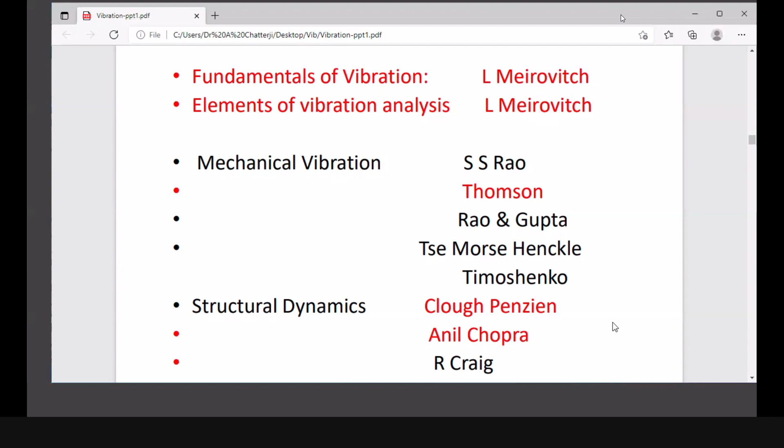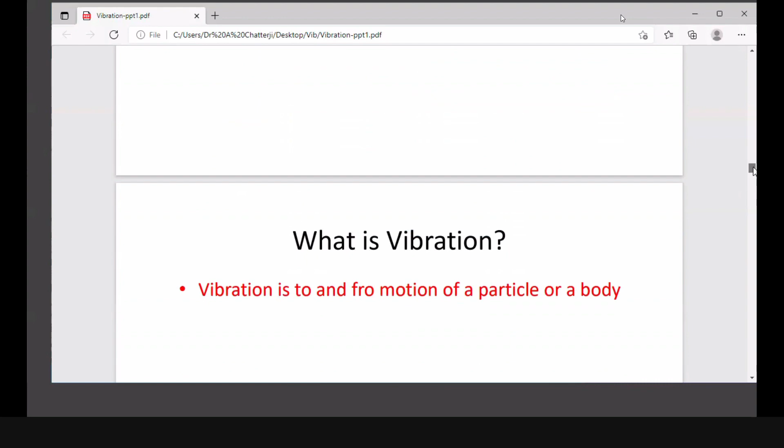All correct, correct, correct. So you need not write down anything, just read the writings, and we can have a discussion on it. Understand? But yes, our subject starts from here.

The definition of vibration - but I will never ask this in exam. What exactly is vibration? Vibration is basically, simply saying, to and fro motion of a particle or a body about an equilibrium position. This to and fro motion may be a linear motion or it may be an angular motion. When it is a linear motion like a spring mass, we call it vibration. But when it is an angular motion, we generally don't use the term vibration, we call it oscillation.

So oscillation refers to and fro motion of angular position, whereas vibration refers to and fro motion along a linear direction. But ultimately the physics is the same. Whatever mathematics is applicable for oscillation, the same mathematics is applicable for vibration. I may use the terms combinedly, but basically they are the same - vibration, oscillation, basically they are same.

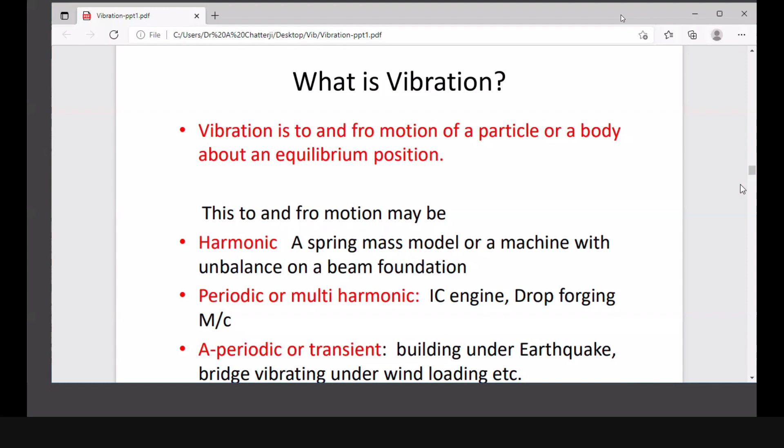These to and fro motions may be harmonic, may be periodic, and may be aperiodic. Harmonic means this to and fro motion follows a sine function, a single sine function. It happens for a spring mass model, or it happens if a machine with an unbalance is placed on a beam. So these are examples where vibration occurs along a harmonic function, single frequency.

Periodic is where a vibration is not a sine function, but it is periodic. By Fourier series theory, we know any periodic function can be written in a series form having sine and cosine terms. So a periodic function is nothing but a combination of multiple harmonics. Harmonic means single harmonic, periodic means many harmonics. IC engine, drop forging machine, these are examples.

However, in our subject, our main focus will be harmonic, and then our focus will be aperiodic. We will discuss very little on this, but we will discuss it.

Aperiodic and transient - what is the difference between harmonic, aperiodic, and transient? Harmonic vibration remains for a long time, maybe minutes or even hours. Aperiodic or transient vibration remains for a very short time, a few seconds, like a vehicle falling into a bump or a road pothole. You feel a vibration, but that lasts for a few seconds - that is aperiodic. Earthquake comes and the building shakes, or wind, cyclone comes, building shakes. Again this is transient because this lasts for a few minutes. This short duration vibration does not follow a sine curve, but remains for very short duration. That is called aperiodic or transient vibration.

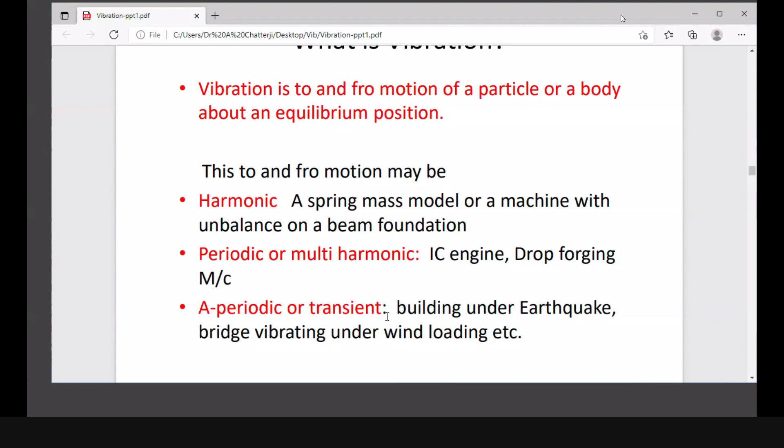And if it is a periodic function, we can break it into individual harmonics. The fundamental harmonic will be 2 pi by time period T. Agree? When we break a periodic function into multiple harmonics, the fundamental harmonic is always 2 pi by time period T. So the second harmonic will be 2 into omega, the third harmonic will be 3 into omega. So we get all the harmonics. So this is a periodic signal - how it will look like.

I don't want to ask this question now, but you can take it as a home assignment - this is a slightly advanced level problem, so I shouldn't give you this today. But for those interested in writing programs, I give you the values of this function for one time period, say 100 values within the one time period, so you can draw the graph. Once I give you the 100 values, can you carry out some mathematics and tell me this is the fundamental harmonic, this is the second harmonic, this is the third harmonic? You have to go for Fourier series extraction and write a program. The mathematics is not difficult, but you have to write a program. You just see if you are interested, but I cannot call it homework right now - this is slightly advanced level homework, fine.

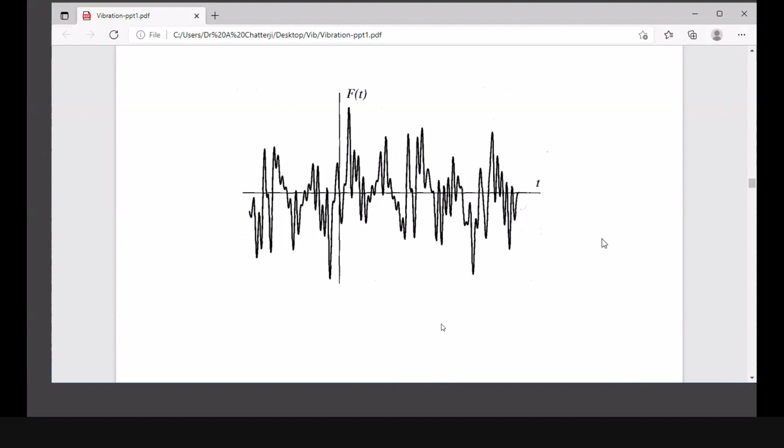Let me come to the simplest example of vibration, spring mass, and this is the equation of motion. This is for translation vibration and this is for angular oscillation. But their equations are similar. Second derivative, here also second derivative. So if I can solve this equation, I can solve this equation also. I will not take up the pendulum equation.

I will take up the spring mass equation. Remember, yesterday I mentioned this is the linearized equation because fundamentally it is sine theta. For small theta, we assume sine theta can be replaced by theta. So this is the linearized equation, and after that I can say this equation is similar to this. So a simple spring mass system, the mathematical equation will look like m x double dot plus k x is equal to

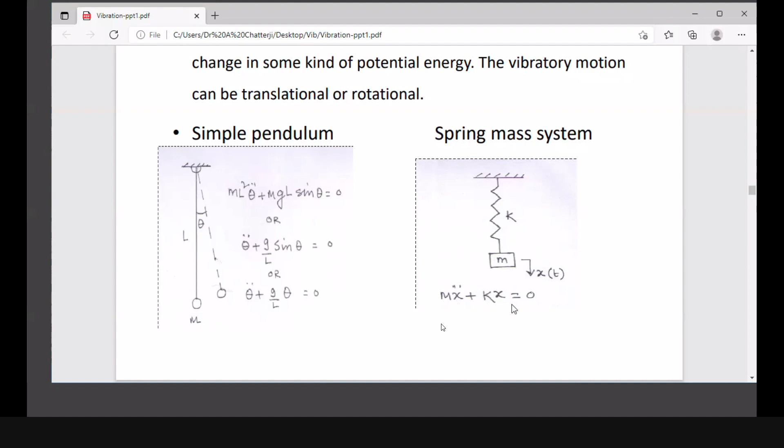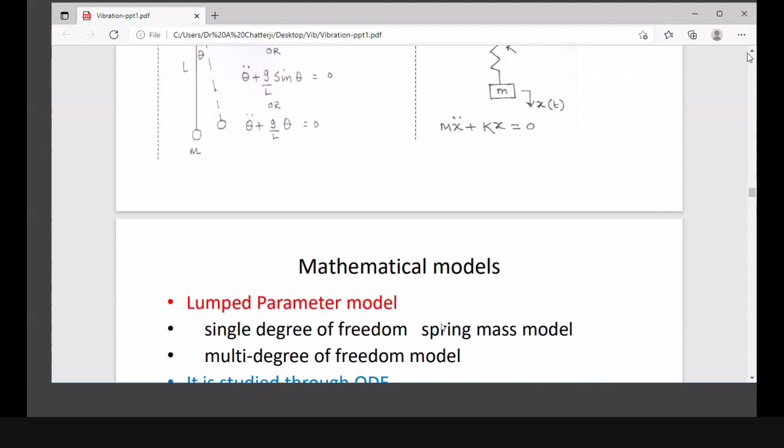0. Question is how the solution will look like. That we'll discuss. But this is called the mathematical model. So mathematical model for a simple pendulum is very easy. But mathematical model for other physical examples may not be easy.

So mathematical models are of two types, lumped parameter model and distributed parameter model. First two months, we will be in lumped parameter model, and from March onward, we will go into distributed parameter model.

It is studied through ordinary differential equations, whereas the continuous system model, where we consider the system as a continuous medium, like a cantilever beam or a simply supported beam, is studied through partial differential equations. Okay, but this I will not focus on now.

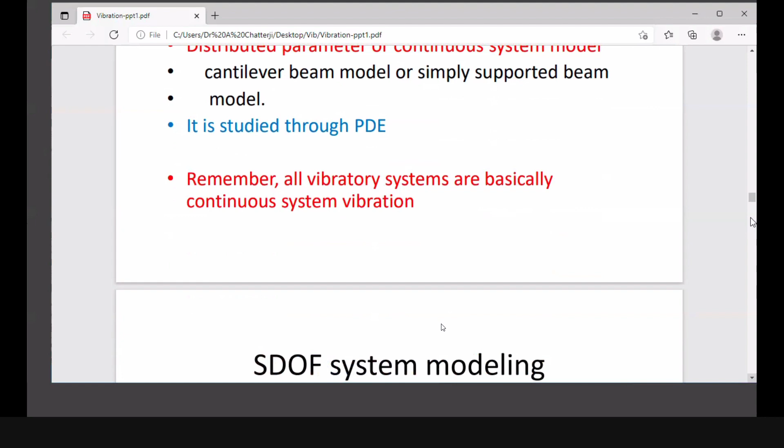In the months of January, February, and March, we will spend time on lumped parameter model. So lumped parameter model also we will start with single degree of freedom.

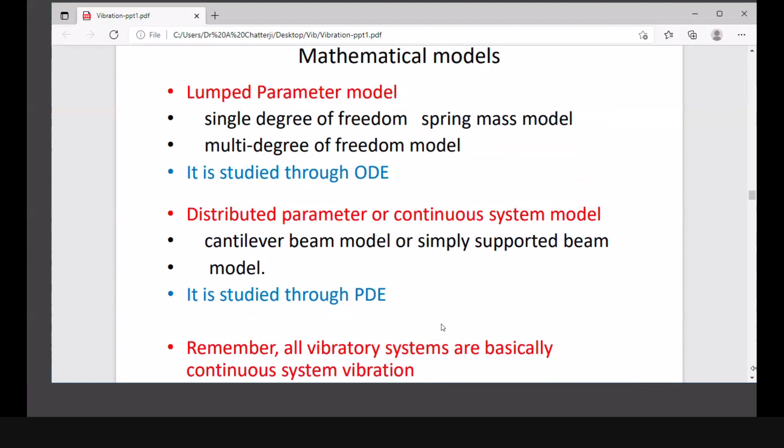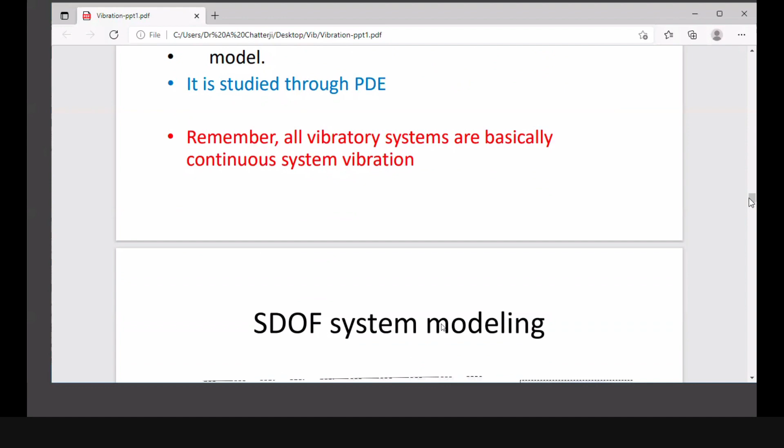Now please remember that all vibratory systems are basically continuous systems. They are not lumped parameter. But we always start with lumped parameter model because the mathematics is easy to handle. But whatever answer we get from lumped parameter model, it's not exact, not very, very accurate. But at least we get some idea of the answer. And that is why we always begin with a lumped parameter model.

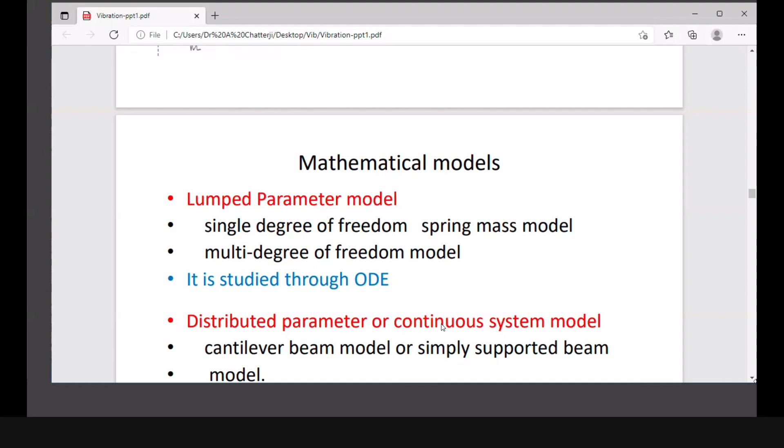But if we are expert in mathematics, we will go for continuous system model. So this is called the simplest single degree of freedom lumped parameter model.

So in lumped parameter model, let me begin with the simplest example, single degree of freedom model. This is a real life problem and this is a symbolic problem, or this is a laboratory model problem. In real life, we never find a mass hanging from a spring. In real life, what we see is different, but it is equivalent to this laboratory model.

So in real life, I have a concrete beam in a factory, and on top of the concrete beam, I have a machine placed. Unfortunately, some unbalance is present. Because of the unbalance, there will be a centrifugal force m e omega square. The vertical component of the centrifugal force will be m e omega square sine omega t. This is a harmonic function. Because of this force, this beam will vibrate up and down.

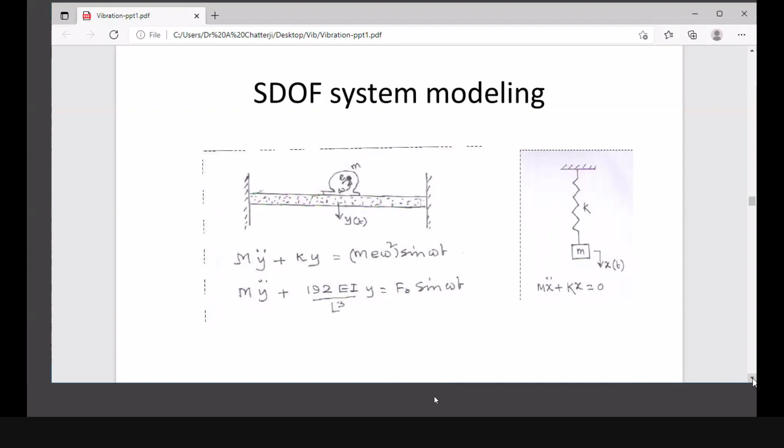By mathematical model, I mean we first write the problem as a differential equation and then we solve the differential equation. So in this case the mathematical model was simple because I modeled it through only one spring, one mass.

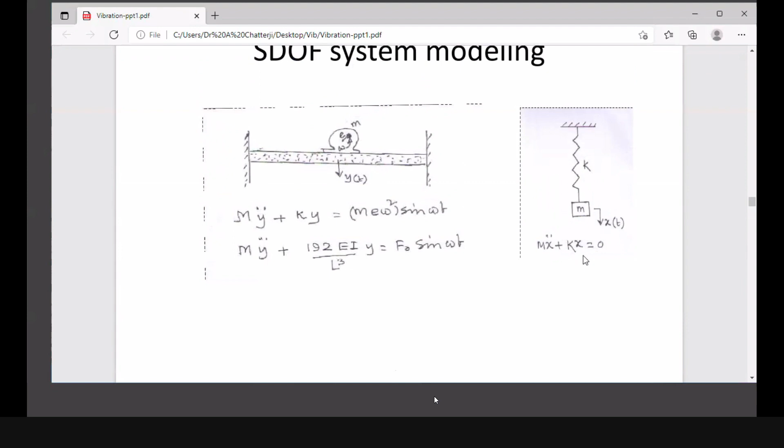So this was only a single second order differential equation. But look at the model of a car. I was talking about the model of a vehicle, a four-wheeler. So many springs are there. Its mathematical model is really going to be complicated, but we will discuss that and you can do that.

But this mathematical model will not be a single differential equation. There will be many, many differential equations. And the problems are of two types.

How do I write down those differential equations? Meaning how do I get those differential equations? That itself is a difficult question. And second is, once I get all the differential equations, how do I solve them?

Because I have more than one differential equation and they are coupled differential equations. How do I solve them? So the challenge increases when my model becomes multi-degree of freedom.

In the previous case, it was single degree of freedom. But now my model is multi-degree of freedom. So the challenge increases. And this challenge increases in two areas.

First, how to write down the equations. We'll discuss that. And second, how to solve them. We'll discuss that. But this is definitely a challenging job.

But once you can write down the equations and once you can solve the equations, now you are a master. Any automobile company will pick you up because you can tell them how the automobile vibrates when it is moving

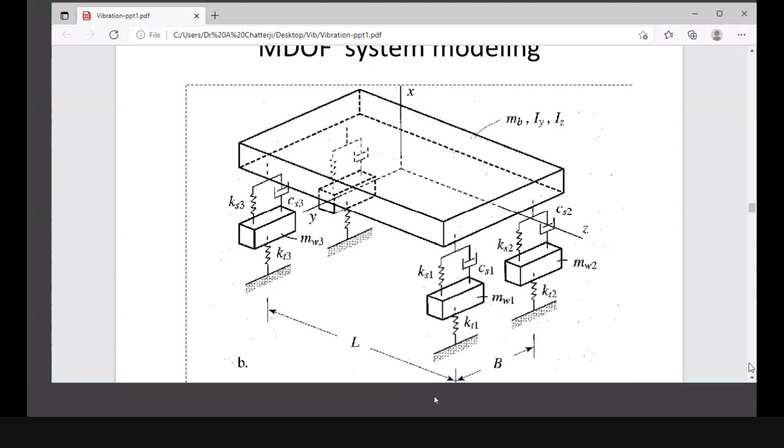We'll discuss later how a motorcycle is modeled and analyzed. So basically, modeling can be of 3 types: lump parameter single degree of freedom, lump parameter multi-degree of freedom, and a more exact model, the continuous system model. We will discuss all 3.

Coming to force, the simplest is harmonic, then periodic, then aperiodic. So this is our syllabus. We'll discuss single degree of freedom lump parameter model, multi-degree of freedom lump parameter model, continuous system model, and fourth, harmonic, periodic, and aperiodic forces.

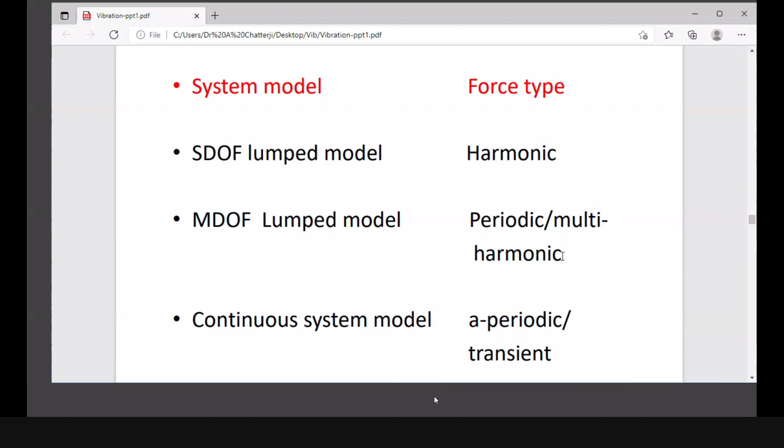This is the total syllabus, but it's very difficult to complete it in 3-4 months. Let me see how I can manage it.

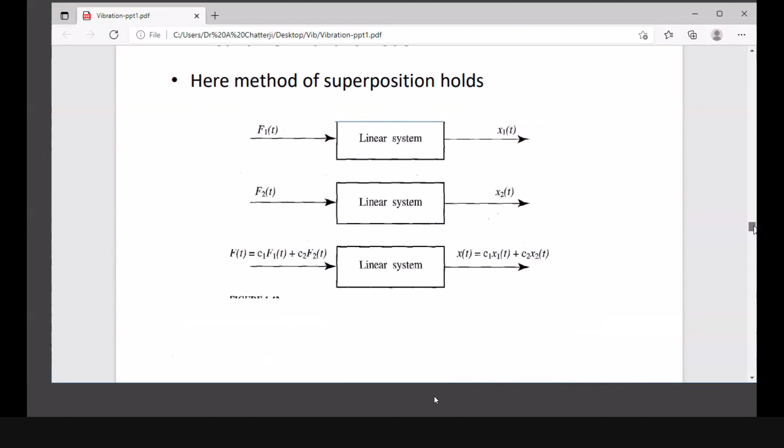Okay, any questions so far? Whatever I have discussed till now, does any question come to your mind?

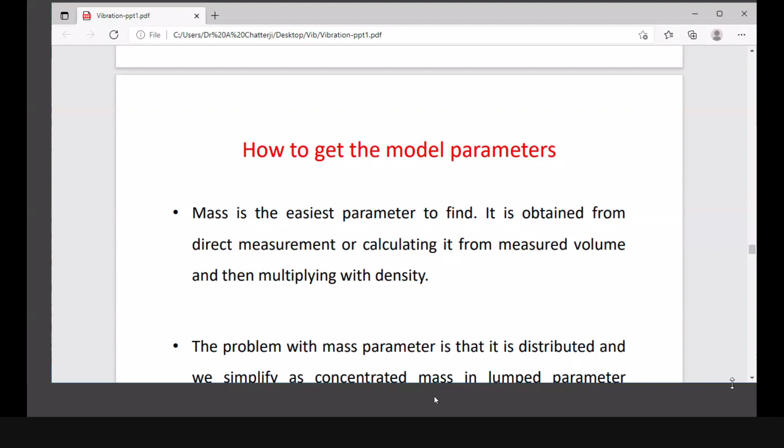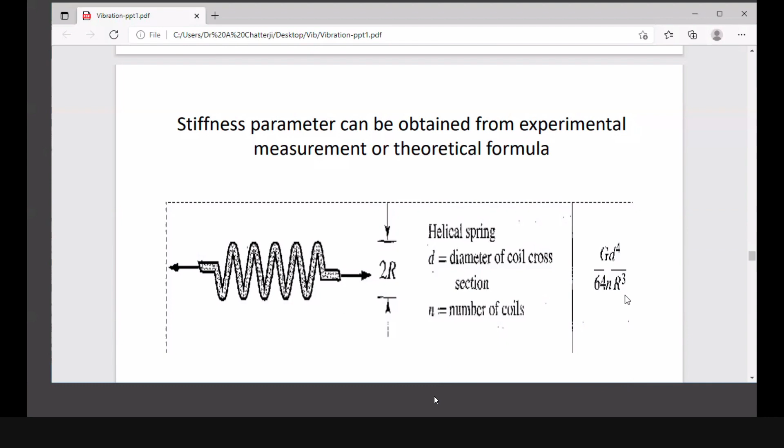Stiffness is also not that difficult. What we do is use solid mechanics formulas. So if I'm given a helical spring, I know how to calculate its stiffness—this is the formula you used in your second year practical, if you remember. Then there are various other formulas.

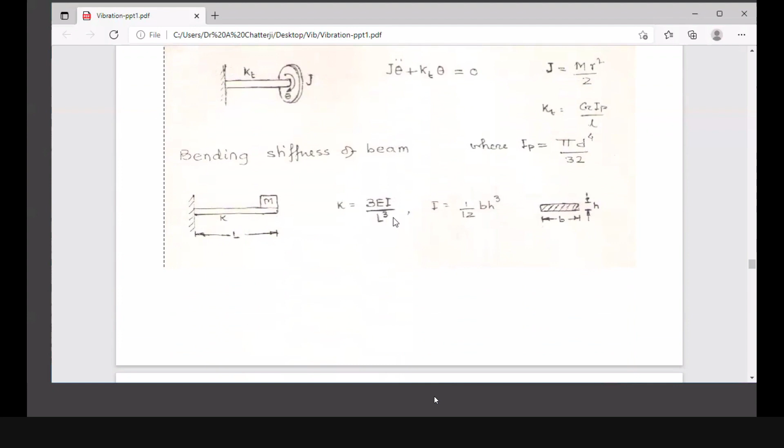If I have a cantilever beam, stiffness is 3EI by L cubed. And I told you that for a simply supported beam, stiffness is 48EI by L cubed, and for a fixed beam it's 192EI by L cubed when the vibration is at the midpoint. But if the vibration is not at the midpoint, at some distance A and distance B instead, the stiffness formula is different.

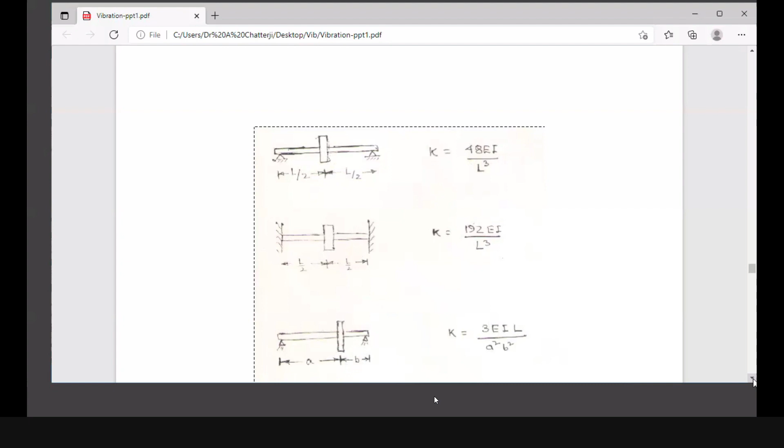It's not just one formula—for simply supported beams, 48EI by L cubed applies when vibration is measured at the center. If vibration is measured somewhere else, we have a different formula. All these formulas come from solid mechanics, so it's not difficult to get the stiffness.

However, the most problematic parameter, gentlemen, is damping. Why have we been silent about damping so far? Because although damping is present in vibration, we generally avoid dealing with it since it's a very difficult parameter to understand and quantify—it is invisible.

And because we can't understand it properly, we often assume it to be viscous damping, since the mathematics becomes simple. But actually, the damping may not be viscous.

Even if damping is not viscous, we assume it is viscous because the mathematics is easy. Is that correct? We'll discuss that - partly it is correct, and partly, 100%, it is not correct.

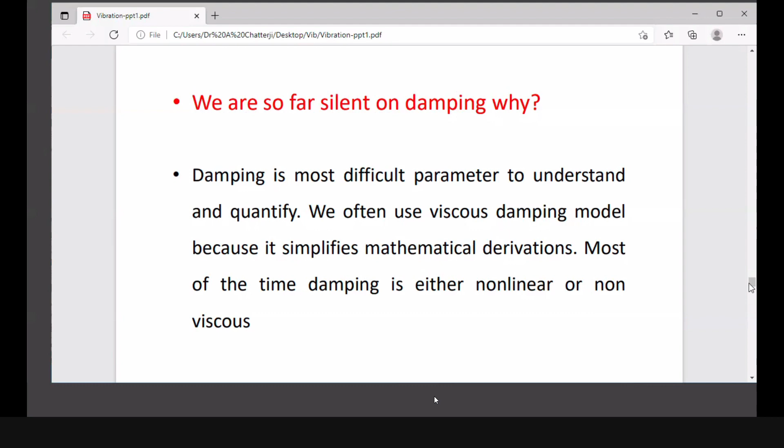Another problem with damping is that it is most of the time non-linear and non-viscous, so damping creates a lot of problems in our study. But we'll handle it - we are going to be engineers, so we will handle everything. Engineers never say no; they have to solve the problem.

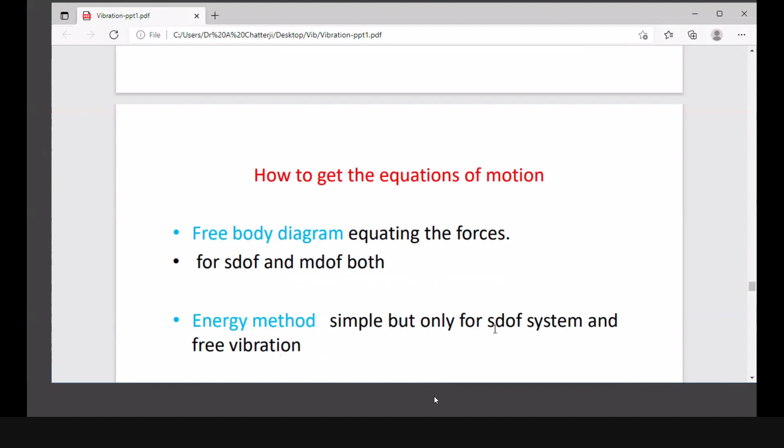So how to get the equations of motion first? The simplest method is the free body diagram. But there is a beautiful method, and I prefer it, called the energy method. Unfortunately, the energy method is simple, but it can be used only for single degree of freedom systems where damping is absent. For multi-degree of freedom systems, we go for the Lagrange equation.

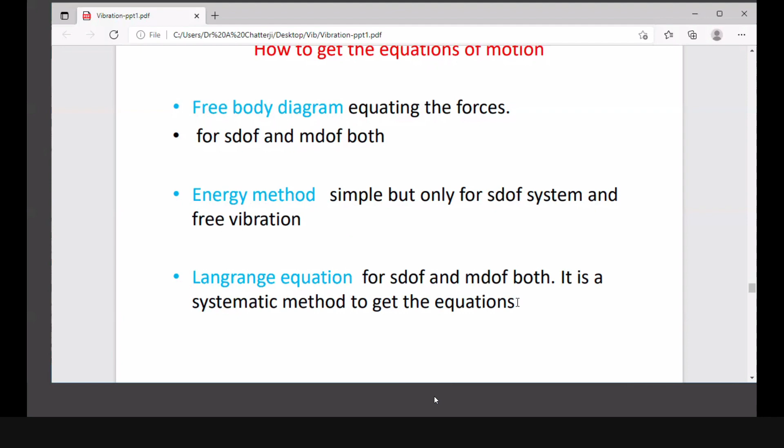So as far as we are concerned, we will try to use the free body diagram if we can draw it, or else we will use the energy method if damping is absent and it is a single degree of freedom system, or else if it is not single degree of freedom, we will go for the Lagrange equation. Using any of these methods, our purpose is to obtain the differential equation of motion.

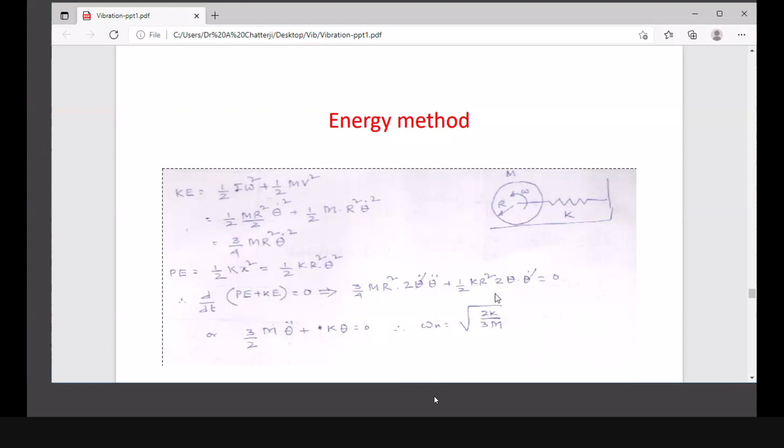Just have a look - for 2 minutes, study this problem. In this problem, we obtain the differential equation by the energy method. The energy method says first you find out kinetic energy, you find out potential energy, make the total, and differentiate with respect to time t.

I think you already know this from JEE - the problems are solved quickly by this method.

Remember, kinetic energy has rotational kinetic energy and translational kinetic energy, both will be present because this disk is rolling without slipping - it has translational motion and rotational motion. So kinetic energy rotational is half I omega square. This I is not area moment of inertia, it is mass moment of inertia, mr square by 2. And this is my kinetic energy due to translation, so this is the overall kinetic energy.

And this is potential energy. I total it up, I differentiate with respect to time t, and finally this is my differential equation. The differential equation immediately gives me the natural frequency.

So this is the energy method. Is anyone facing any problem or difficulty?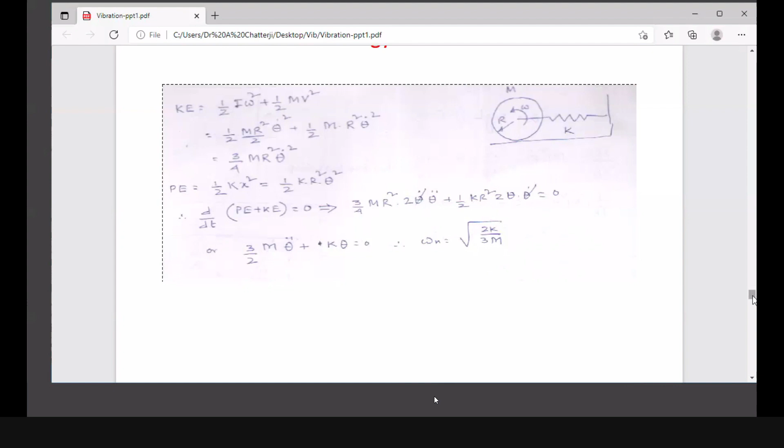So today we have discussed how, if a system is presented before us, we can obtain the differential equation of motion for a single degree of freedom system using the energy method. Let us see another problem.

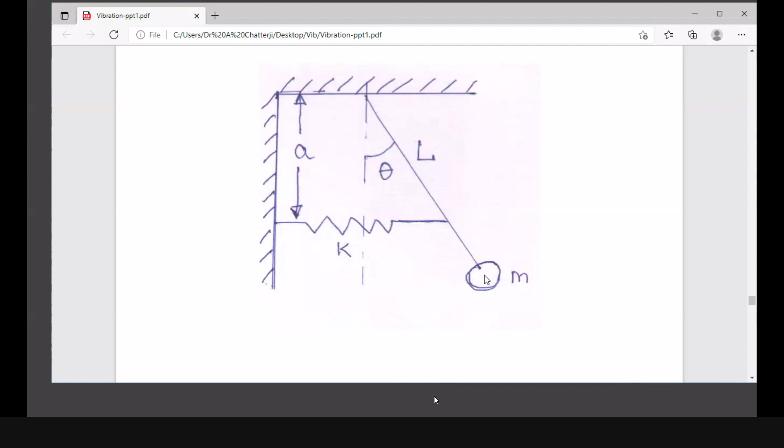The spring also gains potential energy because it has stress. So potential energy will come from extension, stretching of the spring, and it will also come from the uplifting of the mass. Let us see, have I solved it? Let me see, correct.

So potential energy gain is half K, then stretching square, stretching is A into theta, and this is the potential energy gain because of vertical movement. So this is potential energy, this is kinetic energy, and this is the total energy. Now if you differentiate, you get the natural frequency.

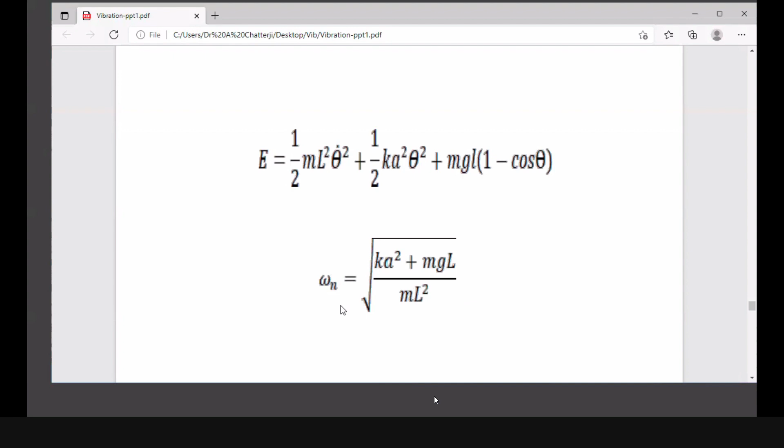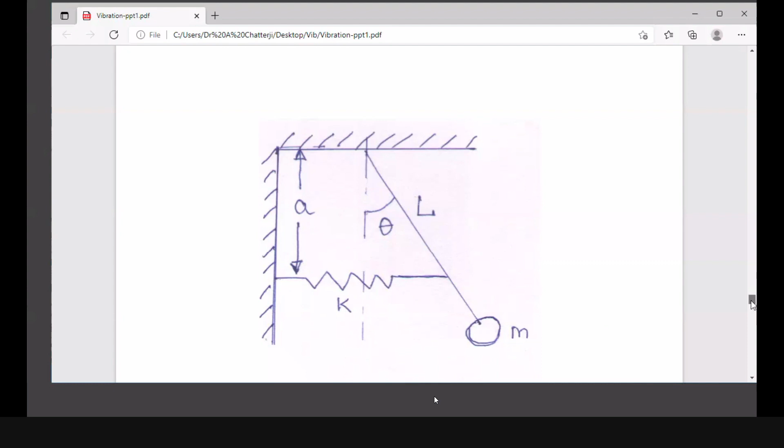Interestingly, this problem has come in IIT JEE, I don't remember, perhaps 10 years back, which we can easily solve by the energy method. So I stop here. Only thing, I have so many questions where you have to write down the equation of motion and get the natural frequency. How will you model this? Tell me, how will you model this? How do you prepare the mathematical model there?

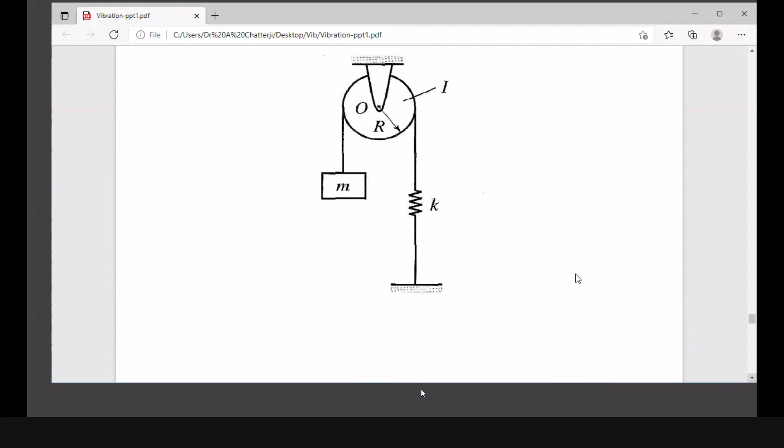So this is another example. These are standard exam questions. Again a JEE level question, you can easily solve it by the energy method. I have picked it from Meirovitch. This is the answer, of course, of that problem. I'll give you all this PPT.

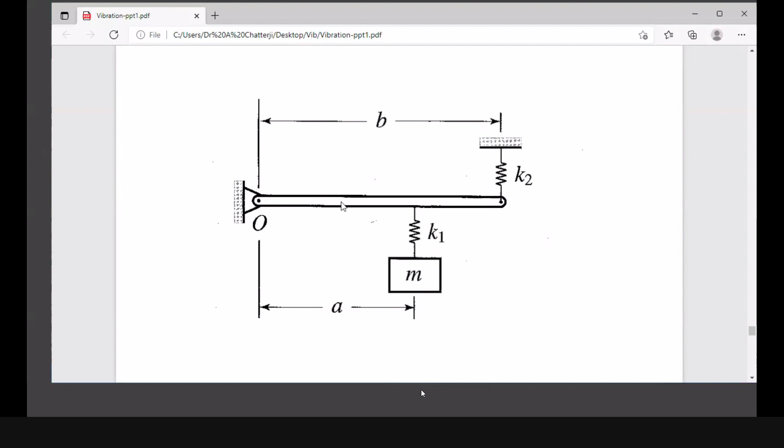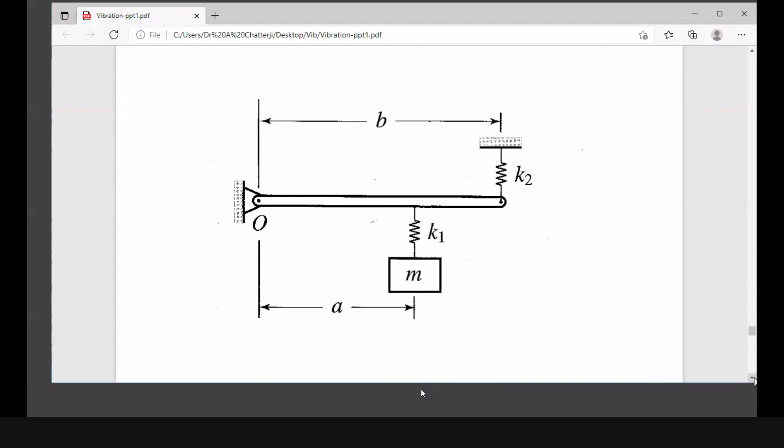This is another problem. Here also we need to find the differential equation, but here we neglect the mass of this beam, we call it a rigid beam. We neglect the mass of this beam, but we will consider the mass m and find out the equation of motion. This is a difficult problem, but again these are all IIT JEE questions.

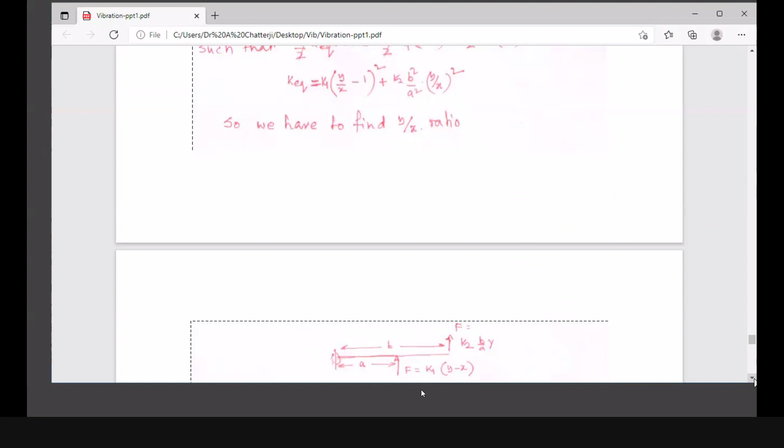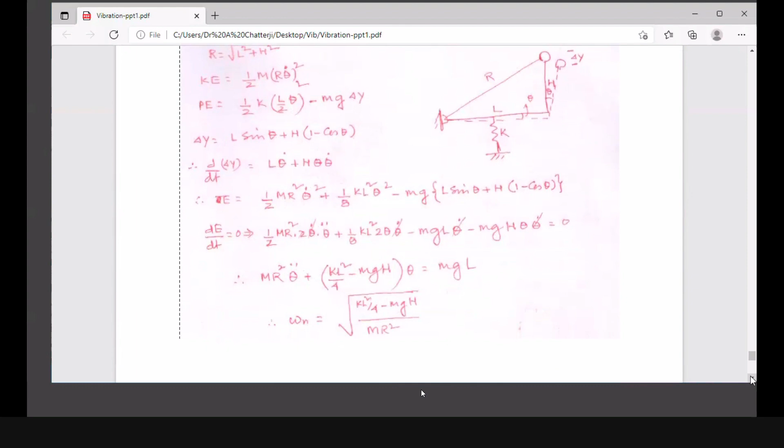We have solved this one here. I have done the solution, but I should not pass on the solution to you. But this is another problem. So we have a large number of problems where what I'm expecting from you is that applying the energy method, find out the equation of motion and then finally find out the natural frequency. So all these problems are solved problems, I have all of them solved with me.